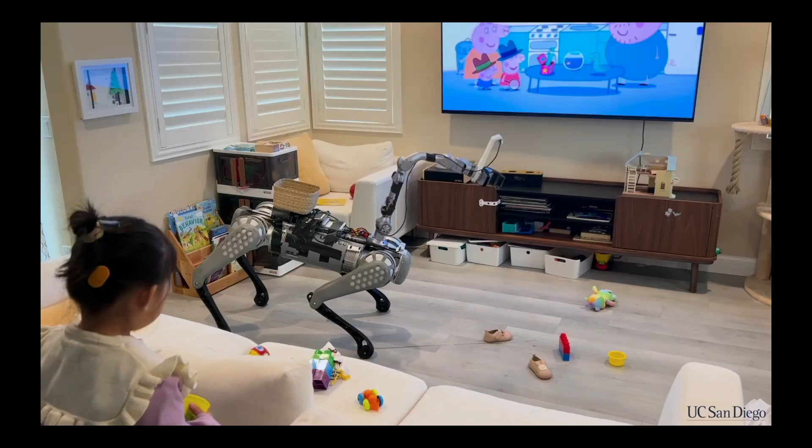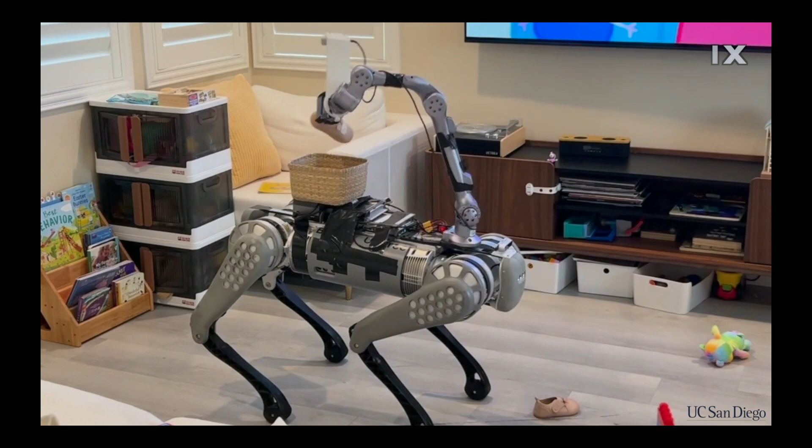So basically, you will see a Unitree robot doing some pick and place, but actually also with some whole-body control as well. I call this a toy example in the sense that, A, it is picking up toys, and B, it's actually simpler than it is in reality. So basically we staged it a little bit, right? It was much more messy.

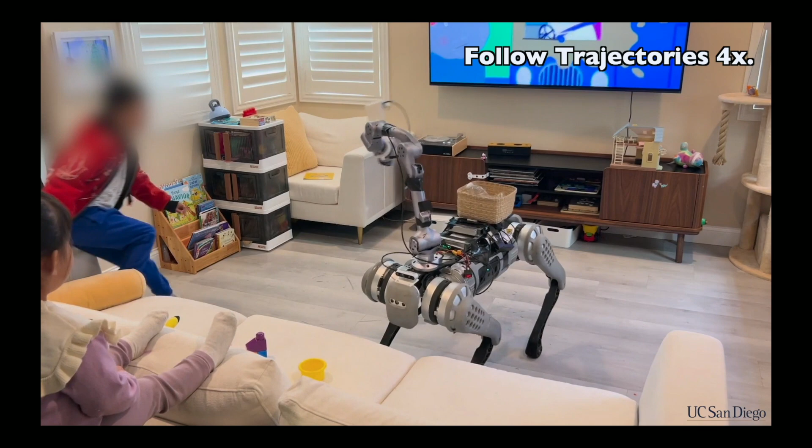As we were doing these experiments, obviously my daughter was focusing on Peppa Pig, so it's all fine. Actually it doesn't intimidate her at all.

As we were doing this experiment, having this robot at home doing these things, we did realize that the robot is a bit too large. It looks fine in the living room, but as you walk along the hallways, it almost takes up the whole hallway, and it's pretty huge. The quadruped robots. So then what do we do?

Basically you can buy a larger house, which we ended up doing, but not for the robot, for a bigger backyard. But that's not relevant.

But the other thing that is more realistic to do is basically to squeeze your robot a little bit. So that's maybe a motivation for why we do humanoid robots. It's pretty slim. It can be very, very slim, and it has many functions.

And when we talk about robots with legs, there's always the argument: why do you not use wheels? Why do you actually use legs? Why don't you do wheel-based robots? Why do we even care about arms and legs, with so much complexity and so many degrees of freedom? I would say, at least from what we have been doing and the progress in the community, locomotion is really almost close to working. And whenever something is close to working, I think it's a good place to do research. Then you will make it work, right?

I come from a vision background, right? I worked with Kaiming as well, and a lot of things he did were basically making something that is almost working become working, and that's where you make the highest impact. So I think this is a position where we can make the highest impact: something almost working, and then making it work. And even the wheel-based robot is surprisingly very large.

We have purchased some of these robots, not exactly the same, but essentially on wheels, and it's quite tall. The wheel base needs to be very large for the robot to maintain balance while doing many things. So humanoid robots still have the advantage of operating in narrower spaces compared to wheel-based robots. It's debatable what kind of robot we should use in a warehouse, but in narrower spaces the humanoid robot has a bit of an advantage. So given that it is almost close to working and has a bit of an advantage, we have put a lot of focus on this type of robot recently.

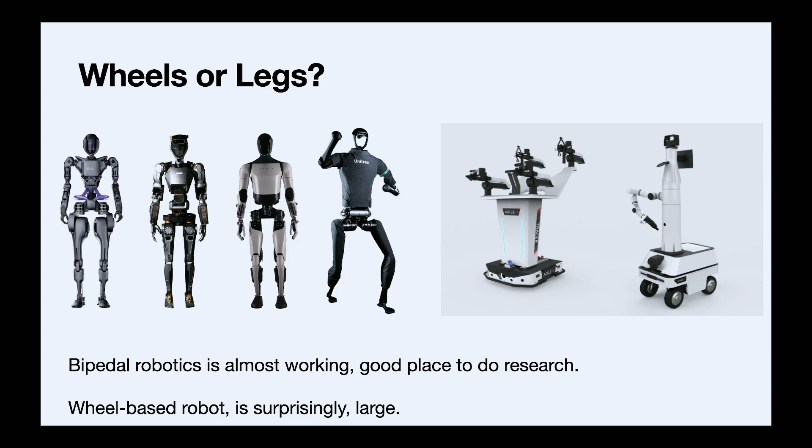I'm a purely data-driven learning guy, so everything I do is very data-driven. So you think about where you get data, right? You can get simulation data, demonstration data, human video data. One big turning point for me is actually this work that we published in NeurIPS. It's also a work in collaboration with NVIDIA.

It's close to true, but it's not exact. It's plausible, but it's consistent. Yes. So it will not be very accurate, but I think the important point is that this model is getting some sense of detailed distance metric, and then can reason upon them.

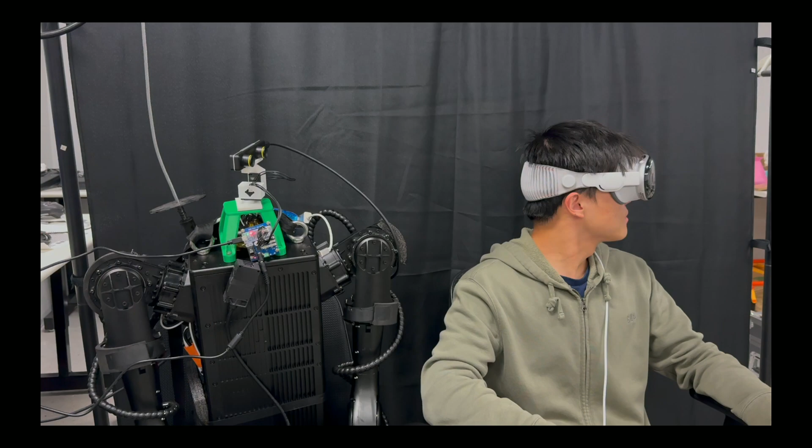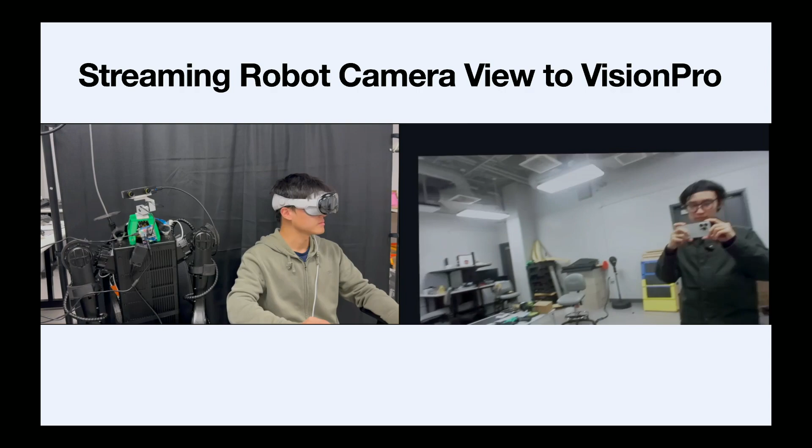The first system design is we put a little head on this robot, and this head can move as our VR glasses move. At the same time, you are streaming whatever this head is seeing in real time into the VR glasses. So this person sees exactly what the robot sees. For example, the robot sees the back of the head of this student, and it is streaming to the student's eyes.

Vision Pro offers very good pose estimation. When you put your hands in front, occlusion might affect it, but without occlusions it gets the key points very well. So you can use a retargeting method to project your hand pose into the robot hand pose space, and control the robot hand by just recording the human hands, while streaming what the robot sees from the first-person camera to the VR, so you can control it remotely.

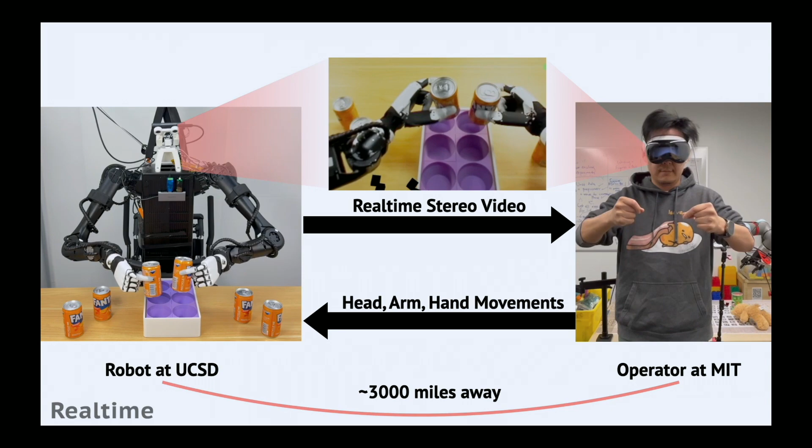This is an example from one of our collaborators, a postdoc at MIT who's on the job market. He's Phillip Isola's postdoc, but he remotely collaborated with us. In MIT, he's controlling the robots at UCSD. The video is streamed from UCSD in real time to the MIT site, and he can control the robot remotely to do this kind of insertion task.

The latency is actually quite manageable. You feel it, but it's like 0.1 second, considering all the transmission of the videos and also the control latency. Many people just try to adapt it a little bit. I will have a demo in the end where we bring the VR device to CoRL in Germany and do real-time teleop from Germany to control robots at UCSD.

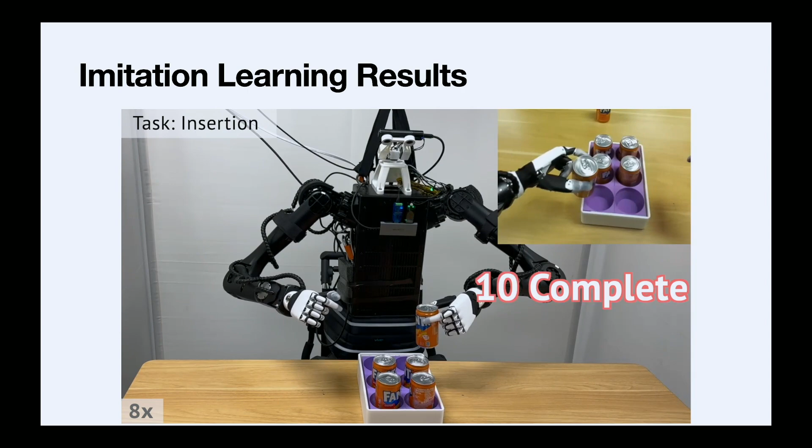Once we collect demonstrations, we can do some imitation learning. This is some rollout. It's a very first attempt, very naive, I would say. It's always this particular drink, so there's no generalization, to disclose. But one thing I like a lot about this work is that if you see the head, the camera is always moving. The little innovation we like in this work is the very active perception.

I like this a lot because I come from more of a vision background. If you have ever worked with Ego4D videos, egocentric videos, it pretty much looks like this: a human hand moving around all the time, doing things with your hands. This is essentially the same, but it's a robot hand instead of human hands.

The policy is quite simple. It's just behavior cloning, using a feature extractor like DINOv2. But the interesting thing is the action space is not just the arm and hand actions, but also your head. So you have active vision: you are moving your head as you are doing manipulation.

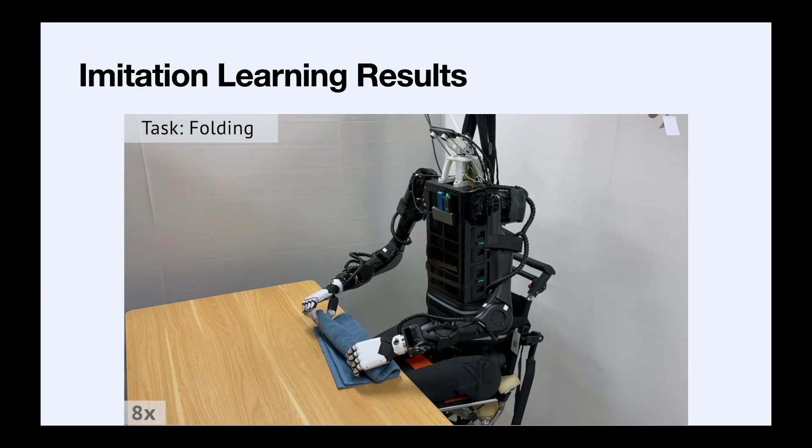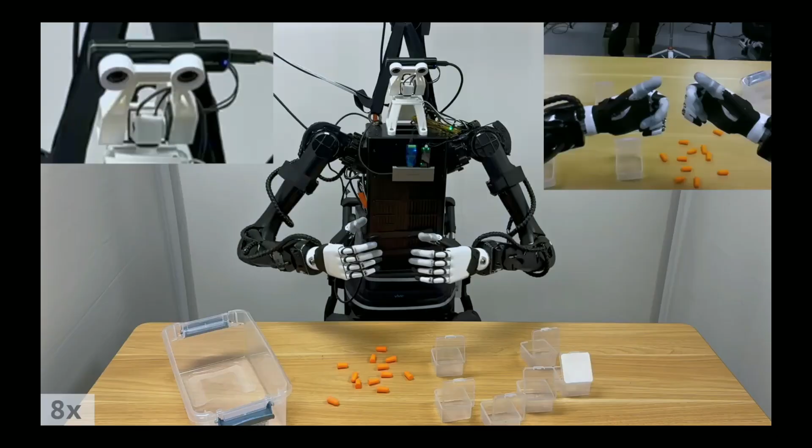We generalize to other tasks. Of course, towel folding is like a $100 million business, so we should fold some towels as well. These are some examples, but it's still not generalizing. And then we have some other teleop results. Those were autonomous, but this is specifically teleop.

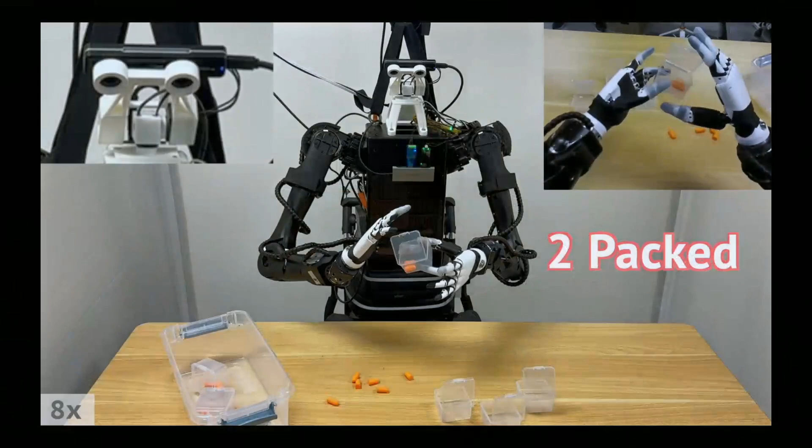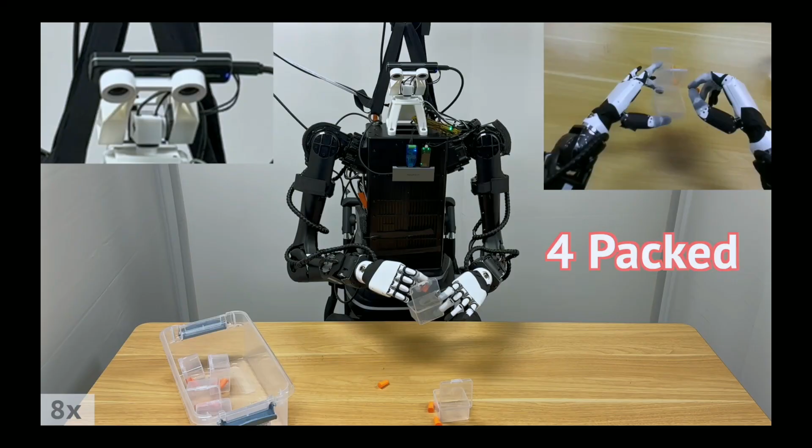I show these results because they give you a dexterous feeling, that you can do very detailed, fine-grained operations. It's worth mentioning that egocentric vision is especially critical for these tasks. We have other teleop projects in the lab where people operate the robot from a third-person view: the robot is here, the human is here, and you control the robot by looking at it. With those tools, you are not able to do this kind of fine-grained task. You really need the egocentric view of the objects. With other teleop papers, we are not able to reproduce this kind of demo.

Can you talk about some of the challenges of implementing behavior cloning for this particular task? There's no behavior cloning for this task. I know, there isn't, otherwise you'd have shown us. Why not?

When we are collecting demonstrations, which I will also introduce in the next work, it takes a lot of time, maybe 1 to 2 hours to collect 50 or 100 demonstrations. So it's really limited, and it doesn't generalize across objects, or across objects in different locations. That is still pretty hard when training from demonstrations alone, at least at the scale we are collecting data. We don't have tens or hundreds of people collecting.

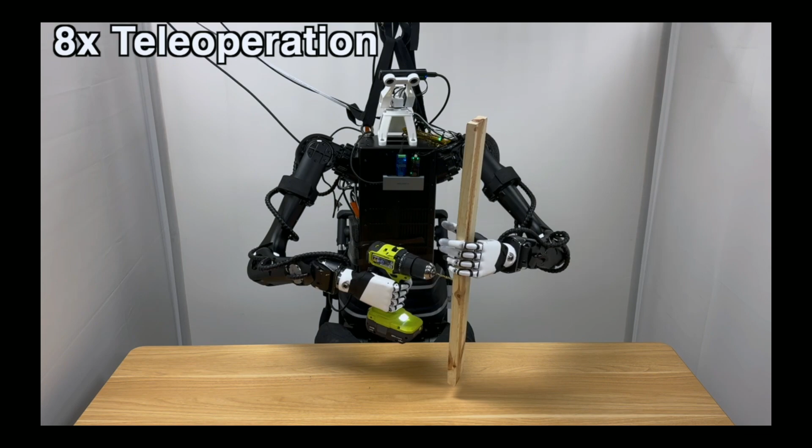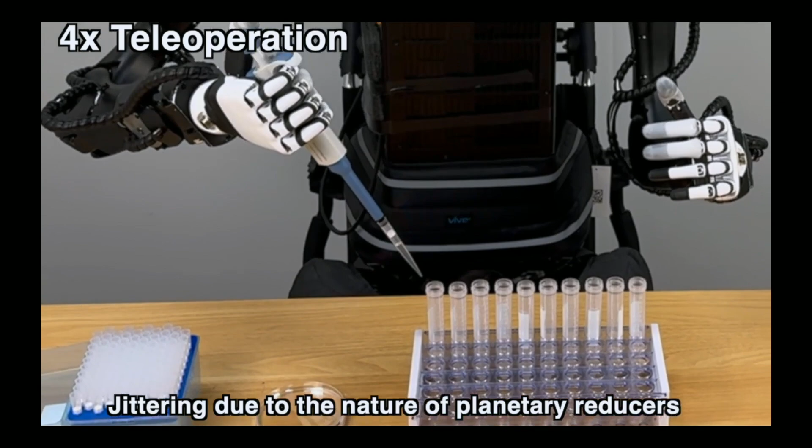So we also show this demonstration because when we work on 6D pose estimation, we always estimate the 6D pose of the drill, if you're familiar with the task. But no one actually uses it, so we just try to use it a bit for real. So this is just for fun. It has enough strength to do it, and then putting it out. Right. And then a little bit of precise control. This shows that having egocentric vision can allow a little bit of precision, but it's not really doing the right thing. It's not supposed to touch, but that's the best we can do.

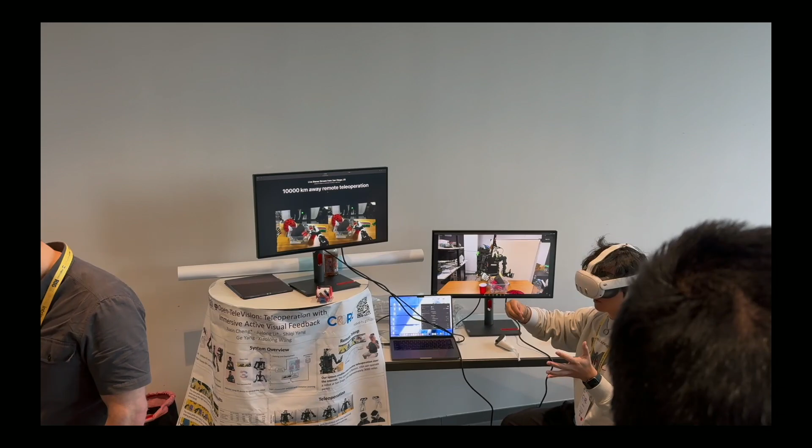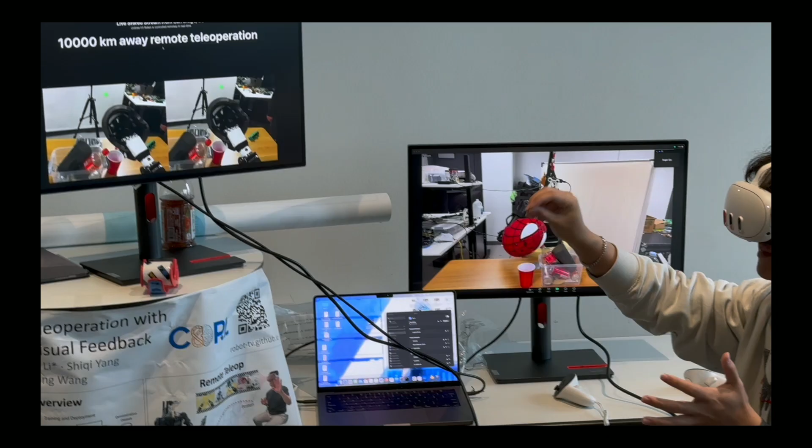As mentioned in this work, this is a lot of demonstrations. This is a CoRL booth we had last year, and here you see 10,000 kilometers away teleoperation. You are basically controlling from Germany to UCSD to control the robot. It's not only our authors controlling; people can walk by, sit in there, try a little bit, and are able to pick something up. The latency is like 0.3 seconds, so it's still very visible, but you can still do something because it's very far away.

So then it gets to the problem that we teleop a lot, and it's very painful. The Vision Pro is also very heavy. It always takes a lot of time, and the robot breaks all the time. The Inspire hand broke like 10 times; we fixed it many times. So is there a very low-cost way to collect the data? In this work, we try to integrate human data as well.

The motivation is, if you think about what we do in teleoperation, we have a Vision Pro, detect the human hands, and then do retargeting or some 3D transformation to get the robot hand pose and then do things. So human doing things and robot doing things is really just a 3D transformation away, right? It's not that different from a human operating in the air to control the robot and a human doing things themselves. So can this human and robot thing be unified in the same space? That's what this work is about.

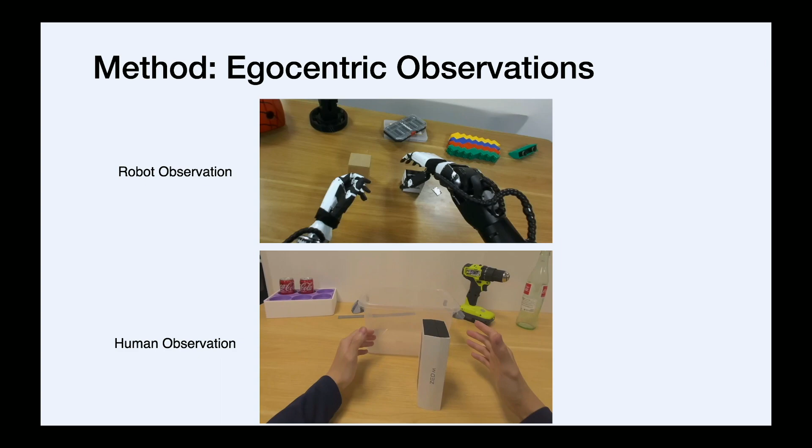So to show you an idea of how well the hand pose is working, I only have this short video. I'll just get back to the slides. All the key points are actually detected by Vision Pro. It's pretty stable and accurate in general. Okay, then we want to do training with both data.

So the general idea is, yes? Did you talk a little bit about task complexity? Like, how did you decide on the task? Yeah, the task is quite simple at this point. It's mostly just pick and place, grasping plus doing something. Is it a limitation of the acquisition, or how did you decide on that?

I think it's the limitation of the imitation learning. We want to show that you not only complete the task, but also generalize to different objects and locations. So we want to show some generalization here. If you increase the complexity of the task, the generalization part is harder. We just haven't gotten to that yet. So that's a step.

Vision Pro is capable of capturing much more complicated things. Yeah, of course. But self-occlusion is still a problem. If it's occluded, then it's missing. But the data collection itself is not a problem. It's more the learning itself. And are the grasps generally like closing my hand, or do they involve fingertips and other stuff? Like, are the grasps of relative complexity?

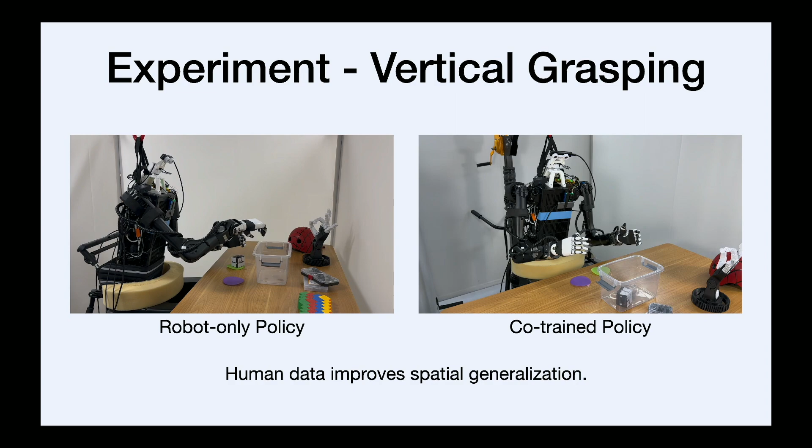So some illustrations in here are basically doing robot only. So the pad does not necessarily exist. I actually explicitly asked we should record video without the pad, because the pad was used for us to just easily compute the locations and do experiments, recording success rate. But by the time I asked them to remove it, the hand had broken, so we cannot record new demonstrations; we're still waiting for the parts to come. So essentially, it helps better generalize to new locations.

And then, this is cup passing. It's basically trying to move a cup from left to right, right to left. But then we kind of change the backgrounds and change the environments a little bit, which has not been seen at robot data collection time. So this is showing some kind of generalization.

So again, this is still very toy, I would say, right? It's nothing fancy, but I think it's trying to prove a concept that mixing the human data in training can help generalization beyond the robot demonstration distribution.

Right. Yeah, I guess this is valuable in understanding that if your robot looks like a human and acts like a human, then getting data from humans is sort of useful. But what if it's not? So that's why the title is for humanoid robots. I mean, not all humanoid robots have the same morphology as humans. Yes, that also defines humanoid robots, right?

So, yeah, I think the benefit of this more human-looking robot is it can learn from humans, but I think it's okay, because if you think about how we project human actions to robot actions, we are doing IK, right? So the arms do not necessarily need to be human if we do the IK well. And then the hand part, even if it is a parallel jaw gripper, I think it can still do that. You essentially just need a way to convert a human pose like this to a gripper like this.

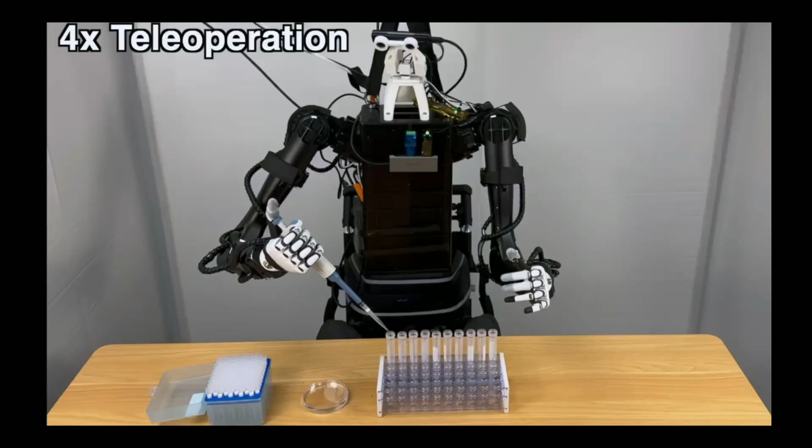I understand. I was asking about the robot teleop. How are you collecting the robot demonstrations? Yeah, so that is this previous work. This is the same work. It's more motivated from here, because as we are doing teleoperation, it really just feels like a human is doing the same thing. So why should we not collect data of humans doing the same thing? So basically, it's like this.

I do want to mention though, this is new, but not that new. We have been trying to do this kind of learning from human demonstration a few years ago.

It was actually like 3-4 years ago, we did a very similar project.

So I'm trying to see what has changed, right? After 3-4 years, what has been different? Why is it working now and why wasn't it working then? One important thing is I think the hand poses are much better now, from Vision Pro to just RealSense and getting some software running. So the hand pose is not shaking anymore. But the object pose is still not very good.

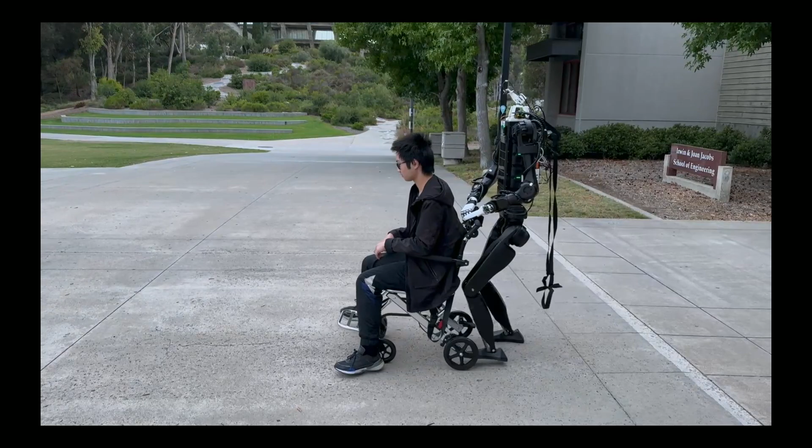So basically, I would then show some humanoid videos. Let's skip the approach there. But we basically do some manipulation with this guy while walking as well. So we have very good controllers. Basically, this line of work is more separation of upper body and lower body. So you basically teleop the upper body using IK and everything, and they have trained a robust policy for lower body to do walking. So this is all teleop results.

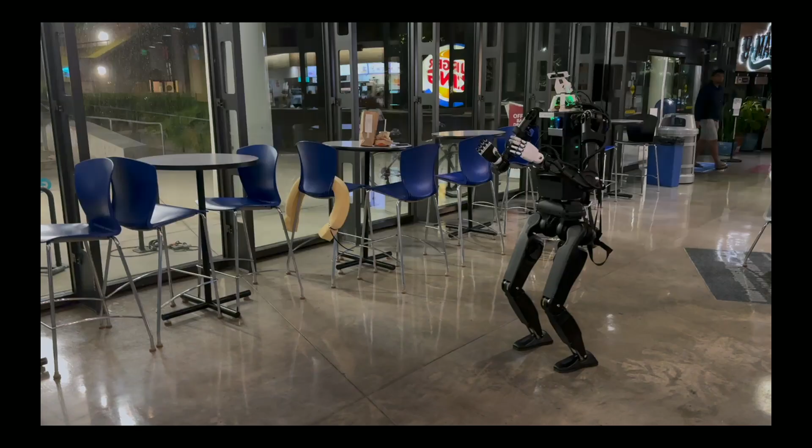So we just show some videos that you can control robots to, so potentially collect demonstrations on moving from somewhere to another place and doing things. So this is a lot of videos. So this is in our cafeteria. So basically, one person is in the back using Vision Pro controlling this guy. So he's trying to grasp this bag, and then put this bag into the trash can. Let's be patient because teleoperation is slow.

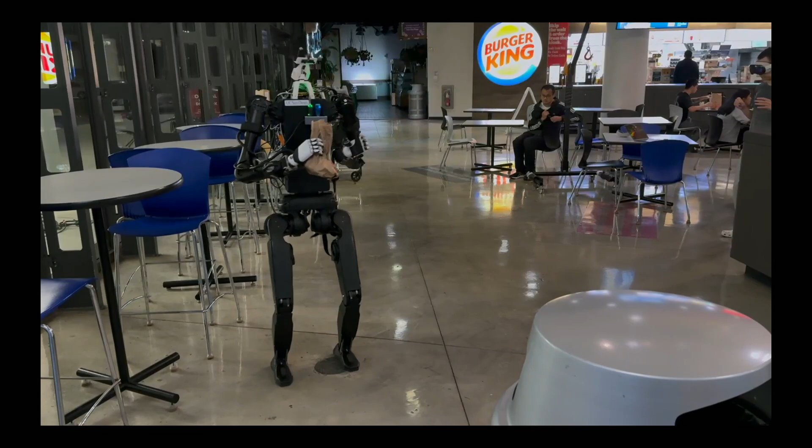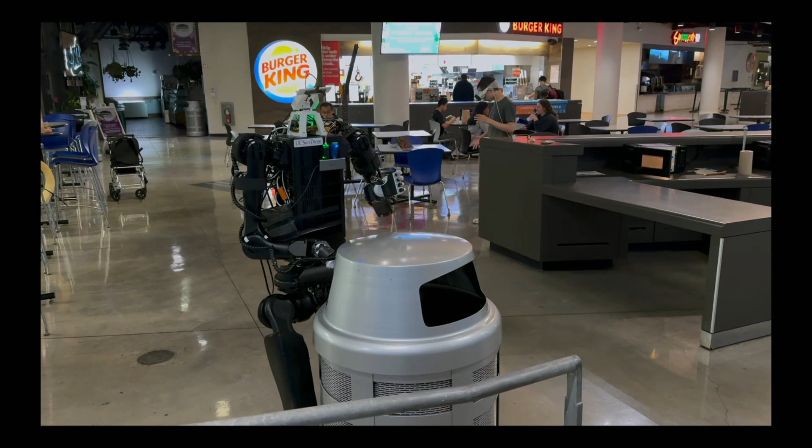But it's not this guy controlling; he's just cheering. But basically, there's this guy in the end who is wearing a Vision Pro, basically controlling the robot to put the things into the trash can. Right. So that's one teleop demonstration of what we can do. So I want to skip some of these videos if you are interested.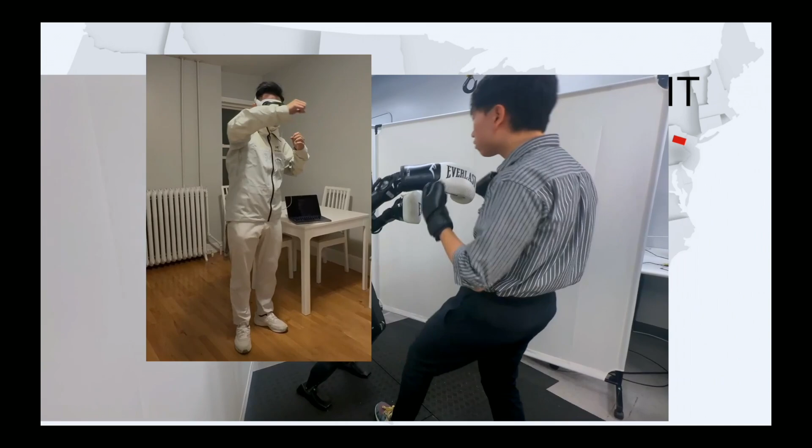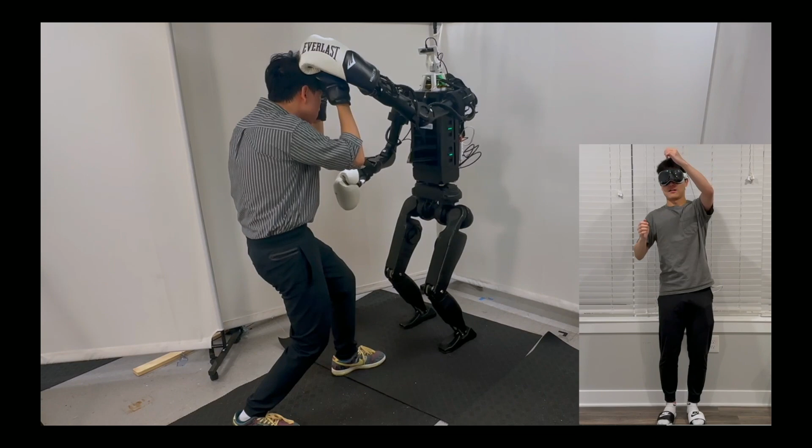It's online. But essentially, we always do this remote teleop. So there's a little bit of acting in here, to be honest. You don't have to be that reflected. And then Xuxin was visiting his girlfriend in Michigan, so I would say, why not do this from Michigan as well? So that's how a lot of video was recorded.

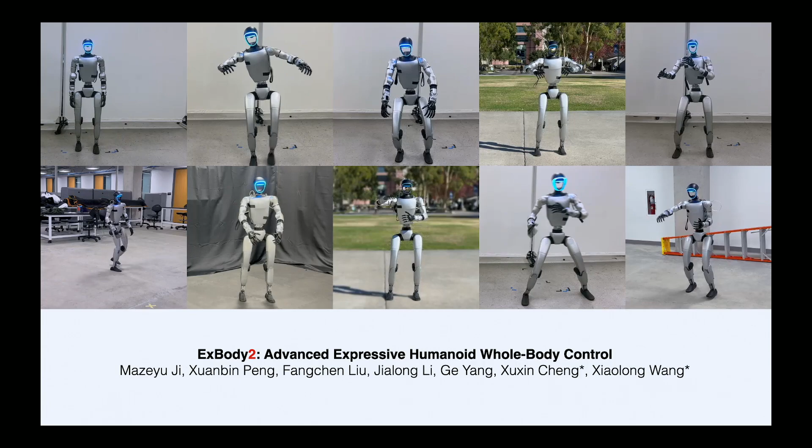So the problem of this guy is basically, it's actually quite limiting in the sense that it's only doing walking for the lower body and then doing something on top. So it's not really whole body control that is coordinating the whole body to do things. So we do also have something that we tried that is actually doing whole body motion imitation.

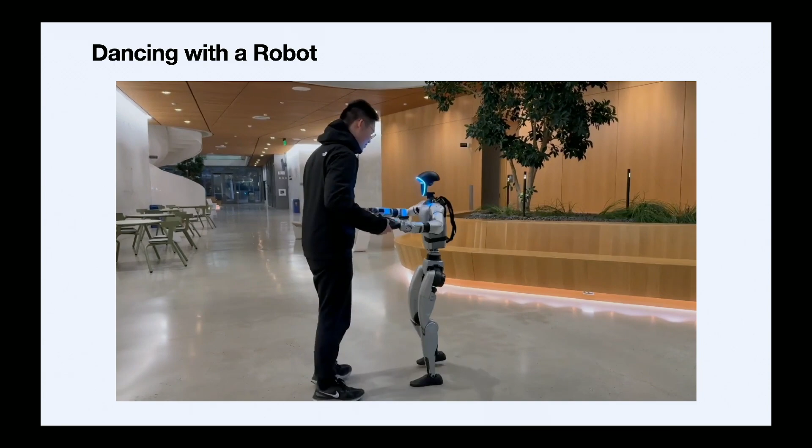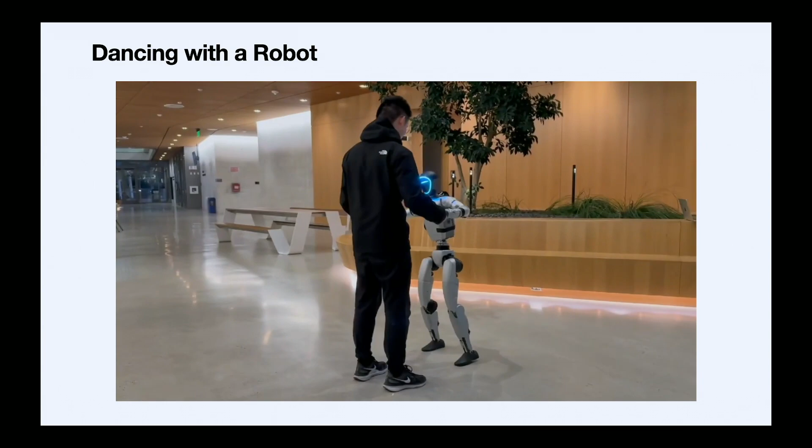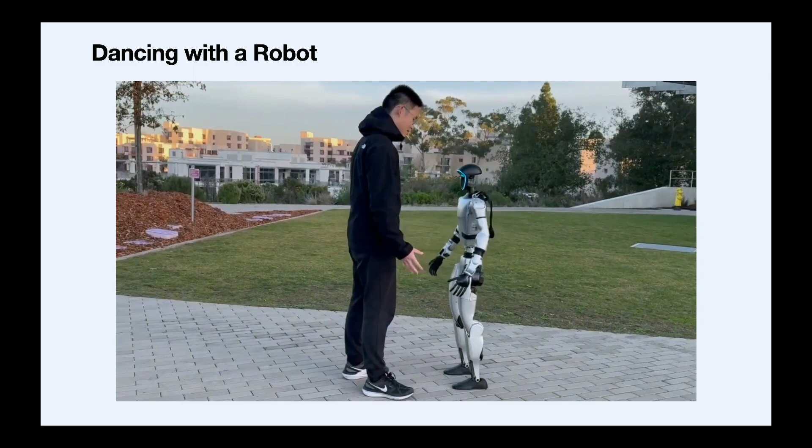So this is kind of dancing videos. It's not using vision or anything. It's actually really just playing the trajectory, but the human kind of just coordinates with it. So there's no feedback actually from observing the human. But it shows that we can do lateral motions in different places and locations. So the G1 robot is pretty nice. It's less heavy and it breaks much less.

So we like it. So I might need to skip some of the approach, but basically, the central idea of this is we are training from the CMU mocap data set. So we learn from a lot of human motions, which are retargeted to robot motions. But then the problem is that training an RL policy to track all the motions is very challenging because they're essentially in very different distributions. You can think of it, there are different modes of motions inside the CMU mocap data set. There's extreme motion, there's not-moving-much motion. If you just train an RL policy on top, it's very hard to generalize to everything.

So we are trying to basically do some data curation, have an automatic way to filter out some of the motions, so that they're not so crazy but not so static, finding a middle point. So after training on that, you can generalize to more different poses. So that's basically the general idea in here. I'm going to skip some of these things, but essentially, these are some results. You can have a human pose and then retarget and train a policy to imitate the human pose and then deploy in the real world.

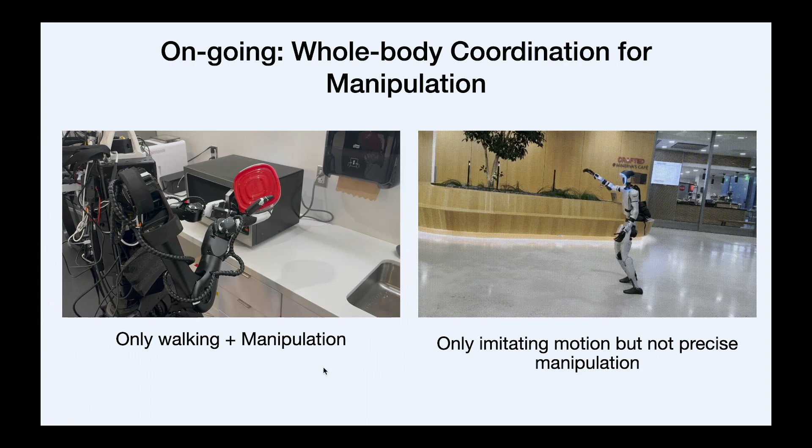So one thing I want to mention, and it's ongoing work I'm not presenting today, but essentially, this work is only walking plus manipulation. Okay, so you cannot do this, right? It's only walking. And with this walk, you can kind of do this and coordinate whole body. But the problem is that your upper body is doing RL to do tracking and doesn't allow very precise manipulation.

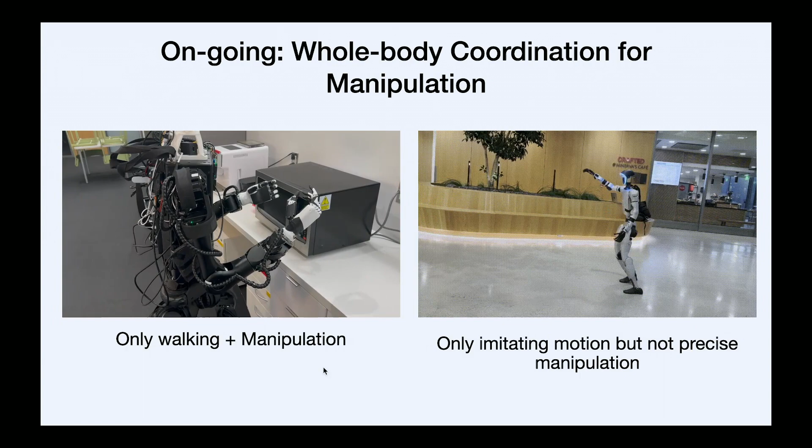So some ongoing future work we are doing is basically how do you allow precise upper body control, but then still do whole body coordination. So using every degree of freedom, but again, maintaining the precise control for the upper body. So this is some ongoing thing we are doing, which I have not shown here.

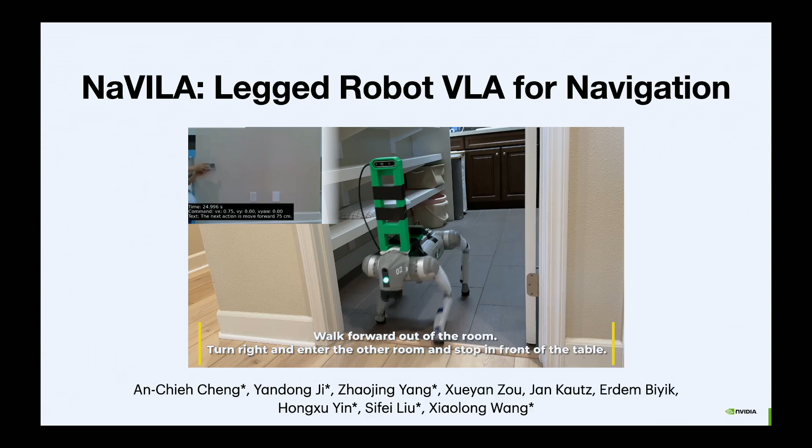And then finally, hopefully I still have a few minutes to go back to the VLA stories. So this is NaVILA, a work that, because NVIDIA has this VLM model called VILA, and then we do navigation on top, so we call it NaVILA. So this is a legged robot navigation framework. So this is my house. I'm doing all experiments in my house.

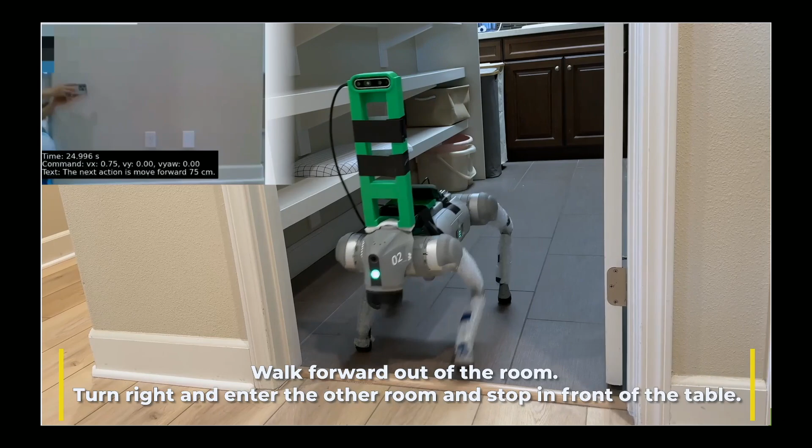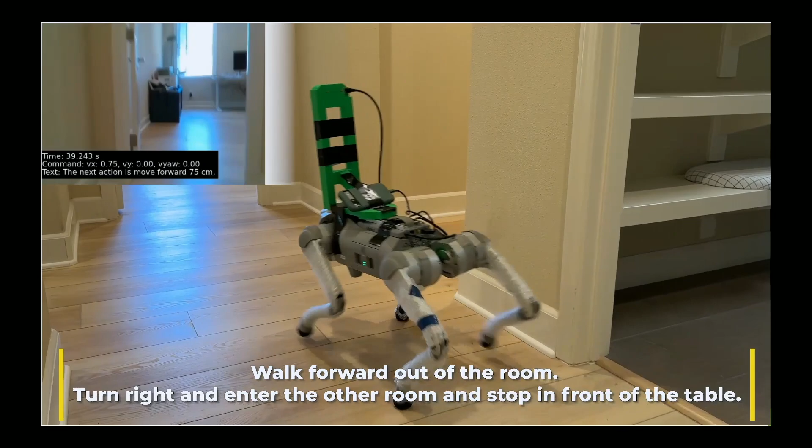So essentially, this is giving a language instruction, and then you need to follow it. So this is actually going to my office. This is the egocentric view the robot sees. And then the VLA outputs the action, like turn right 30 degrees, move forward 25 centimeters, and things like that.

So in here, we basically proposed a two-level framework where the VLA is trained not to output the locomotion action directly, but more like a mid-level action, like I mentioned in the very beginning. So it's like move forward 75 centimeters, or turn some degrees, in the form of language. And then these commands can be connected to a low-level policy that converts this language into velocity commands and then does the low-level control.

So this two-level framework has benefits, for example, how do you run things on board, right? In this case, you can run the VLA at like 2 Hertz. It's still very expensive running this thing. We actually cannot run this on board. Even working with Song's team on all this quantization and efficiency,

we still cannot make the VLA work on board. So we end up just attaching a phone on the robot, sending the image back to our desktop, running the VLA, and sending the action back through the phone to the robot. So the VLA is running on the desktop, but the locomotion policy can run on board. So it can be applied to many different robots. You're training a single VLA. It's agent agnostic.

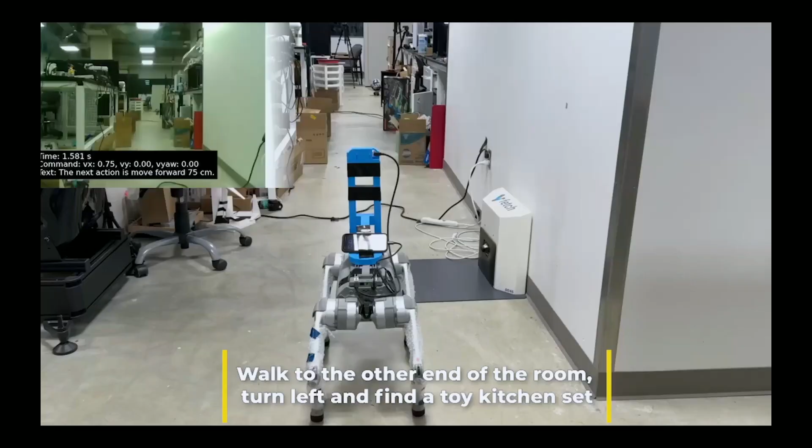And then here are some demonstrations that we apply. You see it actually stops a little bit because of the latency caused by the VLM. We need to transmit the image to the desktop and infer the actions, and then put it back to the robot. So this is our lab. This is saying walk to the end of the room and then turn left and find the toy kitchen set, which is one of the IKEA kitchen sets, which we will see soon.

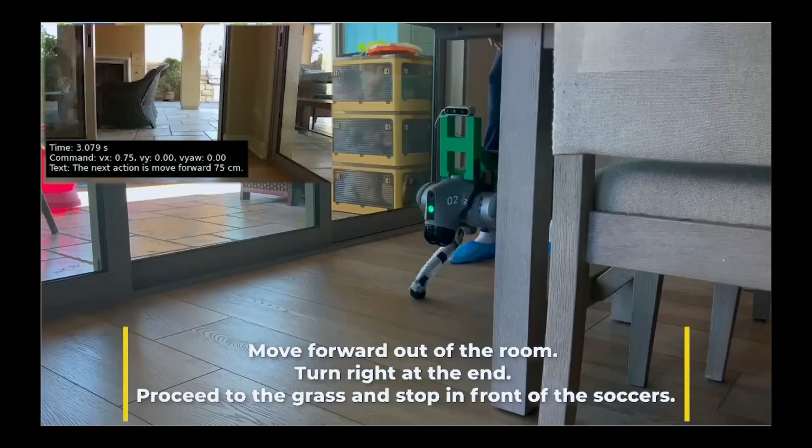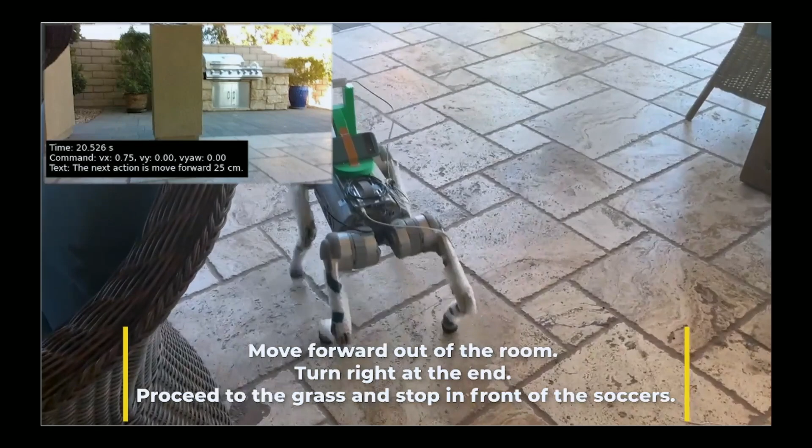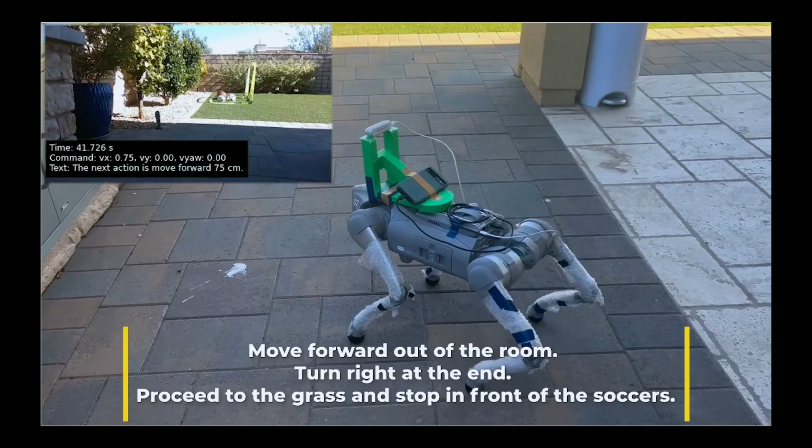And then this is my home again. Because it's a legged robot, we try to show that you can walk outside and also walk over some barriers. There is also obstacle avoidance, so you kind of avoid these columns here in the end. Right, so it's not very smooth because of the VLA, but you can also see the phone is attached to transmit to the desktop compute. Go to the soccer site.

You might have gone over this before, but you mentioned human video data and recording rooms and scenes. Is there any translation between video game simulation data that you can capture as well, which is one-to-one to human video data? What is the question? Is video game simulation data the same as human captured data?

So essentially, we do train on the simulation data as well. The policy is also trained on Habitat, like navigation environments, so it's part of the training data. I hope all this video game simulation data can be used because it's more realistic compared to Habitat. When you say Habitat, what is that? It's a navigation benchmark and simulation environment. It scans a lot of 3D rooms into the simulator, and then you can have an agent walk around and do some planning to navigate around the rooms.

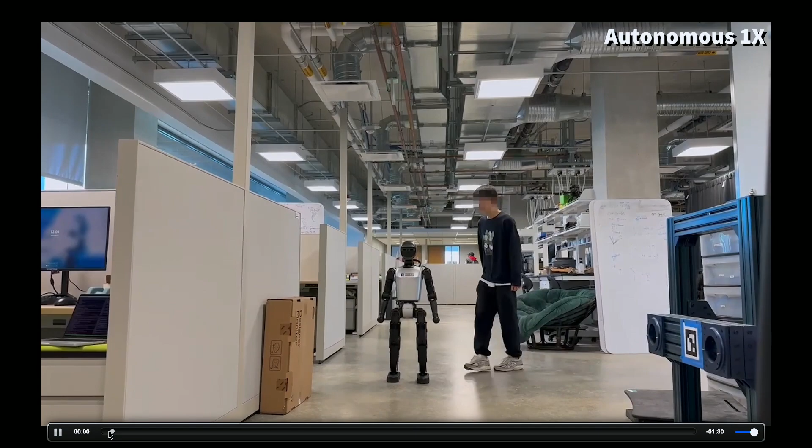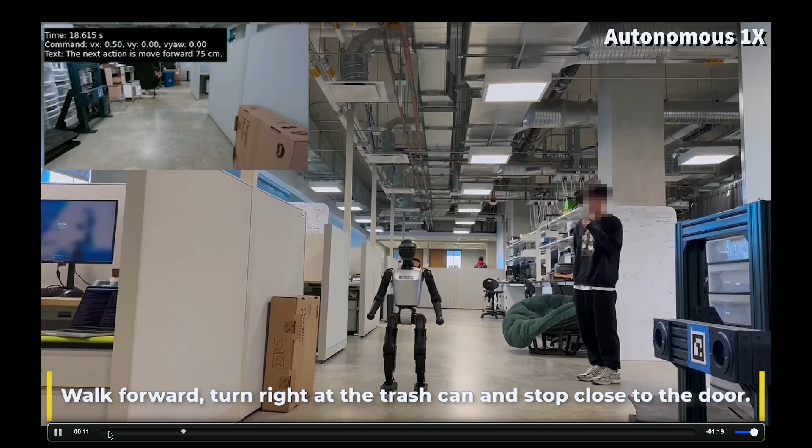We have a new toy called Booster Robot, and we made some interface. It's very hard to hear, but he is trying to do an audio input, then you convert the audio into language, and this guy can follow instructions to move. We do some demos on this. It's stopping because, again, the VLA is still slow. I like this robot, actually. It's a little bit shorter than G1, but it's more robust. It actually has larger feet, so in terms of stable walking, this robot is pretty good.

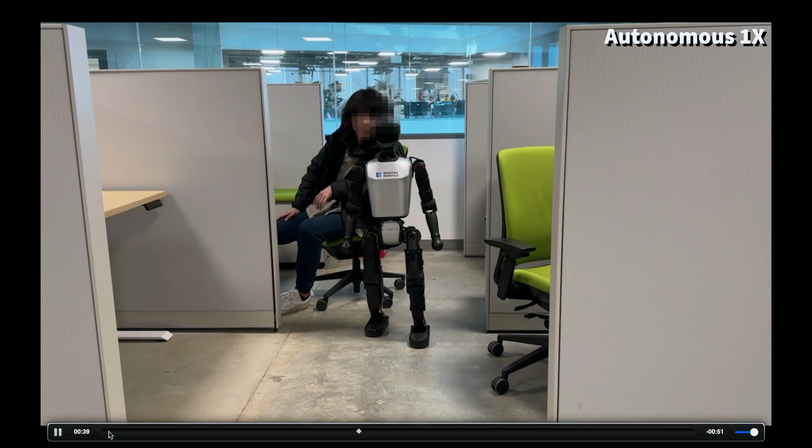It's very long, but essentially, you get the idea. It's trying to take the audio inputs and then do some actions. Okay. Let me finish it, and then I think I'm almost done. It's trying to get to the trash can. You see the trash can, and then getting close to it. Oops. There's no depth perception, right? Yeah, it's pure RGB here.

Yeah, so that's all. I can skip this. Quick summary: we talked about some low level. I still quite believe in this framework that we can do VLA and then low level. I haven't touched the manipulation part yet, but this is something we are also trying to push, that we can do VLA for manipulation with mid-level actions as well, and then try to collect some low-level manipulation skills. So that's all. Thank you.